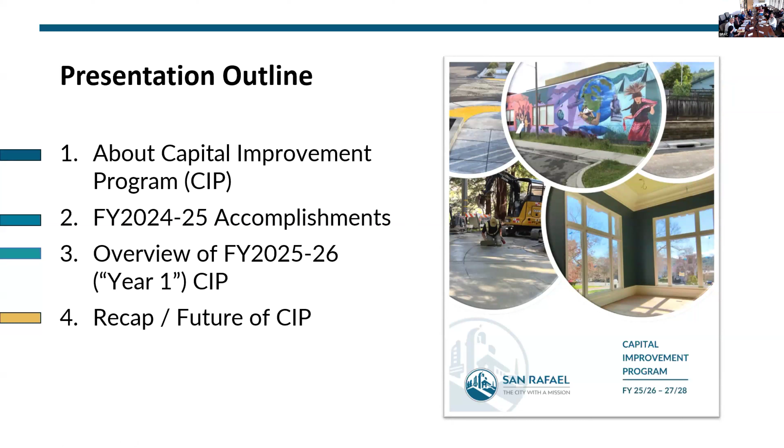Sure - and a quick recap along with what we anticipate doing for the future of the CIP. So the CIP is a 3-year planning tool, and it includes annual programs and projects, all the different funding sources that go into funding our projects and programs, and rough cost estimates for all the different projects. It's split into 4 different categories: building facilities, parks, storm drain, and transportation. Year 1 of the 3-year CIP is usually what gets approved with the council's budget.

Is that what was approved this time? Correct, yep. And then here are some of the - how do I move this off someplace.

So these are some of the projects we've completed in non-transportation categories. We've done some upgrades at AJ Boro Community Center. We've also done some in other community centers like Terra Linda, where we upgraded the partition walls, and there's currently a master plan going on in that area as well.

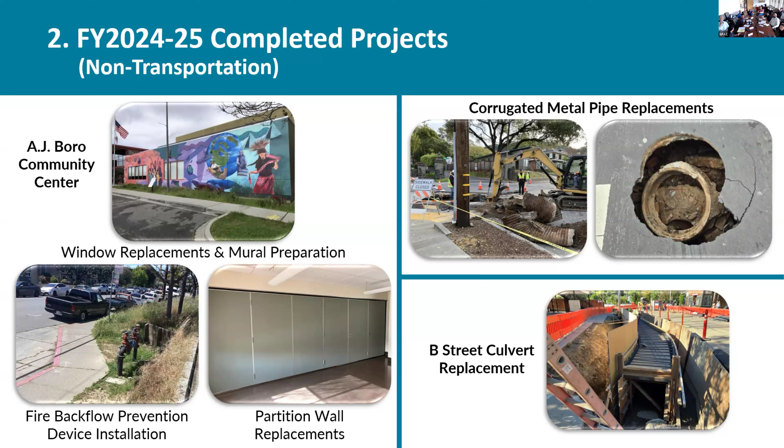We've definitely done some upgrades to our storm drain system. We have some really old corrugated metal pipe, and I think this year we replaced over 300 linear feet of it. Here are some examples of what it looked like during the repair. We also had our B Street culvert that we had to replace - it's been ongoing for a couple years, and we finally finished it up this year, which gave us the opportunity to do some resurfacing on B Street and restriping.

These are some of the projects we've completed in the transportation category this year. There was some parking striping that we did. We upgraded curb ramps on Center Street in preparation for future pavement restoration or rehab work. We've also done some concrete repairs on Fremont and Marquard, and upgraded our backup battery systems - we installed new ones and replaced some old ones, and Kelly was actually our lead for a lot of that, which we really appreciate. We also completed our major pavement maintenance project for this year.

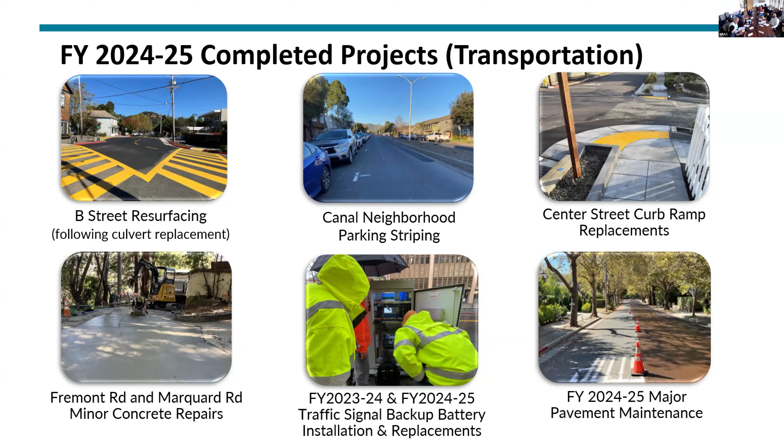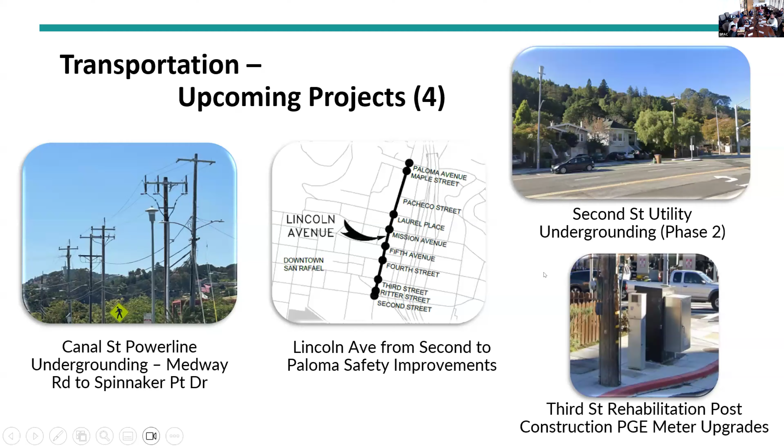So jumping into our annual programs, two of them is our city-led sidewalk repair program and pavement management program. In our sidewalk repair program, in addition to concrete shaving that we do to remove offsets, we also upgrade curb ramps and stuff, similar to what we did for Center Street, to prepare for future pavement restoration work, especially ones that are more a deeper restoration that would trigger ADA compliance requirements.

And then for our pavement management program, we're actually in the process of finalizing our 3-year pavement management program. We're currently going through review through the different utility agencies to ensure that we're not duplicating any efforts in pavement work. And then we continue to do our slurry projects every year. This is also going to include some of our dig out projects where there's deeper alligator cracking or potholes, and that's going to help repair some of that.

And then this also includes one of our TAM funded projects, which is the Nova Albion Bikeway and Pathway Gap closure. We're planning to do some of the bulb outs and striping as part of our pavement projects. That way we can become more efficient with our dollars and resourcing for project management and construction management.

Two other programs that we have: one is the bridge maintenance program, which allows us to maintain both vehicular and pedestrian bridges. Some of the bridges we have on Caltrans and the National Bridge Inventory list number up to about 20, and we also have a bunch of other ones that don't qualify as an NBI bridge, usually smaller ones that don't take vehicular load. We're trying to take an inventory of all of that so we can understand our maintenance needs and compare that with capacity. As part of this program, we're also seeking funding through the Caltrans Highway Bridge Program to help with our projects, one of which we're currently applying for is the Lincoln Avenue Bridge.

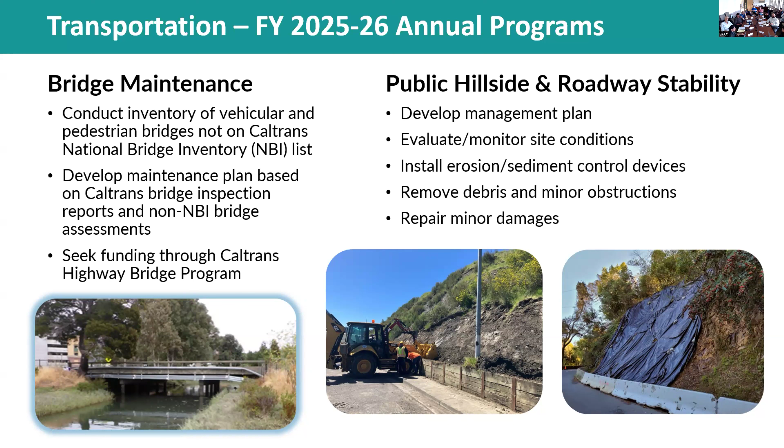Last but not least, we have our annual road safety implementation program. This is an effort to support our road safety plan implementation, which was adopted by council last April. It also gives us opportunities to do other improvements, such as our application of AB 43 to lower speed limits, which you may have seen at prior BPAC or city council meetings. We applied that and are lowering about 20 some segments of road within San Rafael, most concentrated in the downtown area as our first phase. Next year we'll explore phase 2, applying AB 43 to other locations in the city.

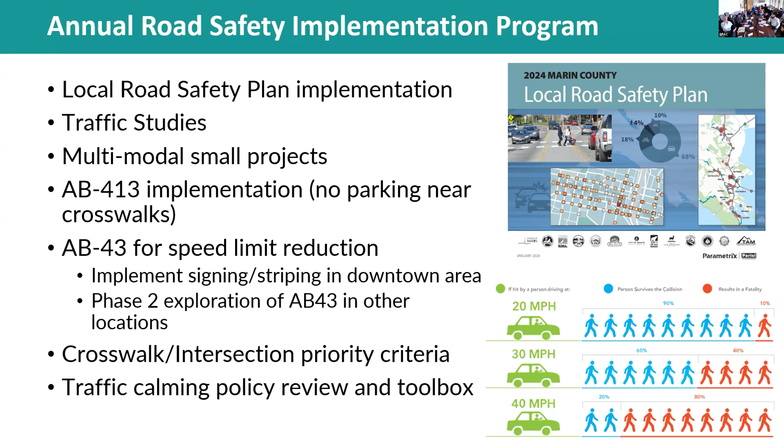For our future CIP, we're going to continue to evaluate what the city and community need. We really use feedback from all these meetings and also from SeeClickFix. We collect data, and anything we see that could trigger a CIP project or be placed as a program improvement is how we collect feedback. Also at community events like movies in the park, which are coming up fairly soon, those are opportunities for us to share what we do with our CIP, how we collect feedback, and pursue additional grant funding to support all the work we do.

Because honestly, with what we're currently updating, our bike and ped plan, our storm drain plan, and we're going to be developing building and facility plans, we're anticipating that our maintenance needs are going to far exceed what we're bringing in as revenues.

And, could you repeat that? I couldn't hear you with the sirens going.

Yeah, so we're currently going through several citywide comprehensive planning documents. We've already completed the Parks and Rec plan. We're currently updating our bike and ped plan. We're also updating or developing a storm drain plan, and we'll be developing a building and facilities plan, matching the four categories of work that we have, to really understand the citywide needs comprehensively. We're anticipating that the recommendations coming out of these plans will show our needs far exceed the amount of funding sources and even staff capacity that we have. So we're going to continue to adapt and integrate what we learn from these citywide plans into our CIP. Thank you. And if you want to see the full CIP report document, you can find that on our website.

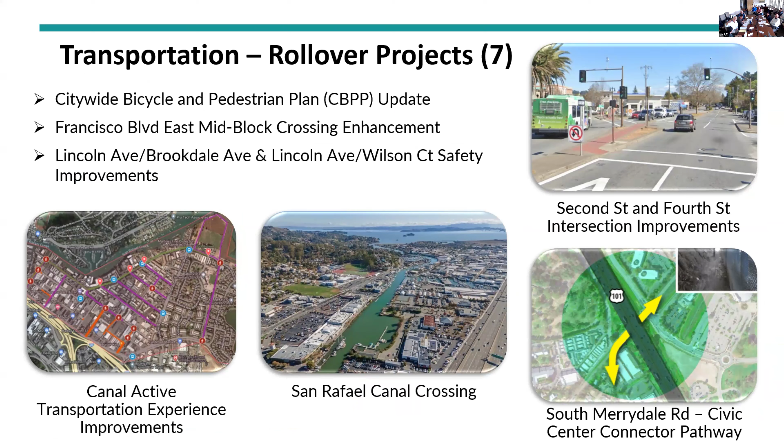Okay, we're looking at all this stuff. Go back to that last slide, and continue. All right, so that's part of the creation for the CIP, right? So under that, there could be a bullet point that says incorporate CBPP updates.

We're talking about a CIP planning process, and at the same time we've got this whole update, and I'm not seeing the connection there, other than it's going through your department. I think that's what the city planning documents include, because it's not just a bike and ped plan. It'd be nice if it was actually written down somewhere, explicitly, that yes, we're going to adopt the plans, or at least look at them and review them.

Just out of curiosity, on one of your slides you mentioned something like Point San Pedro Road design. If you take 30 seconds, can you elaborate on what that is? I know there's at least one person in the room who's interested in what that might be.

It's actually still a coordination item with the county. April probably has a bit more background than I do on that, but it's to redesign what that's going to look like, and our share is to help with the resurfacing of that area, and hopefully implement safe street standards at the same time. Correct.

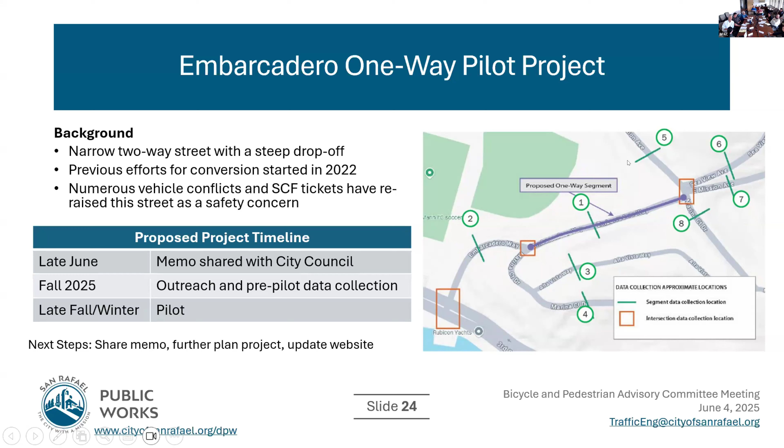So this is... finally, okay good. What are RRFBs? Rectangular rapid flashing beacons. Thank you for asking that question, I realized that got cut off.

What's the Mahon Creek Path, oh yeah, can we talk about that? Sure. Sorry, what did you want to say? Is there a Mahon Creek Path presentation about this? We thought you were talking about Los Gamos Bike. Oh sorry, no, both are happening this summer.

For Mahon Path, I think the green circulation has been kind of what's been happening, but we're trying to enhance it with more signage and striping. Which is what we proposed several BPAC meetings ago. But it's been really hard to get striping contractors right now. We were told about the Mahon Creek Path detour at BPAC, that it's cut off and this is the other path. I had a comment to look at the light for Second and Lincoln to help that circulation. I don't know about any striping that's planned, what is the striping you're planning for this?

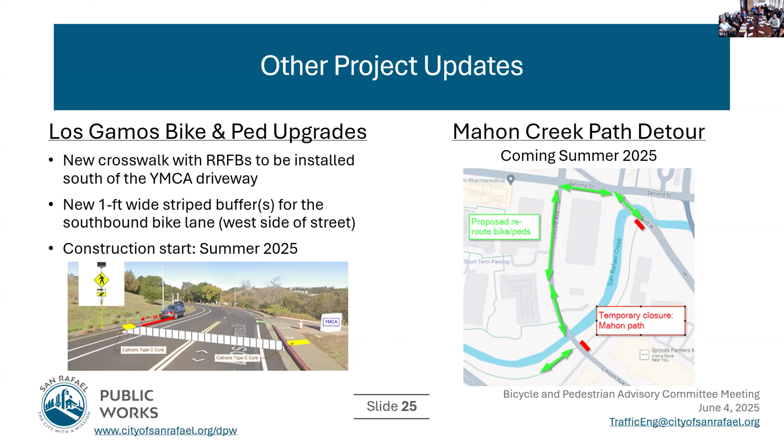So Spinnaker Point traffic calming was initiated as a pilot project in October 2024. We've gotten a lot of feedback and collected data, and reviewed all the feedback we've received through emails, SeeClickFix, phone calls. Right now we're trying to summarize all the findings and develop recommendations. A lot of it is also learning what's worked and what hasn't.

We've even learned a lot from our fire department, like about axle lifts, making sure they can still drive over certain traffic calming measures. Feedback we got includes making sure certain traffic calming devices aren't too tall so they don't scratch the side of trucks, and having them more similar to what the permanent solutions would look like. So those are some of the preliminary feedback we've received, and we're trying to summarize all that and come up with a recommendation.

We plan on coming back later this summer to BPAC. Can you give us a hint? Was it like up or down? I feel like it was very mixed. Mixed, yeah. It's kind of hard to say, so that's why we're trying to quantify all that.

So what you were describing was for speed cushions? Is that because you look at the axle? Yeah, so I think we did a traffic circle at one of the locations, and we were also looking at putting in speed humps. I don't think we actually installed it as part of what we originally planned, but I think we're looking at other opportunities to put in something like that. We have to measure the height of what that speed hump would be, and the width. That was really interesting.

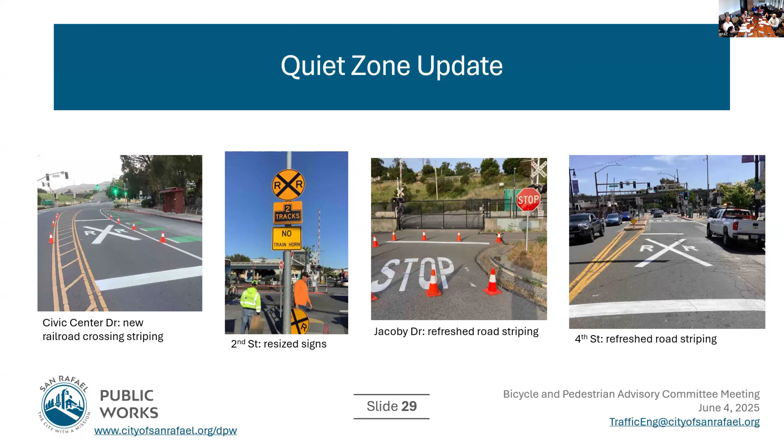Questions on that? No. Anything else?

Thank you. Any questions and comments on the last presentation from the public?

I'd like to make a comment. I really appreciate the route for the bike lane on Lincoln going around the Mahon Creek path. But I want to bring attention to the current status on Francisco Boulevard West at the end of Mahon Creek. I'm seeing more and more frequently slightly suspect, nefarious people parking in the bike lane there, trading things with people from the camping zones. For example, today there's a group of 10 of us, and a person with a Mercedes handing things to people from the camping sections at Mahon Creek. So I'm asking for possible attention — maybe SRPD can have a bit more presence, because there's a dozen of us and we have nowhere to go with cars going by. I appreciate it's a protected bike lane with the bollards, but I think it needs a little attention.

Thank you. Any other comments?